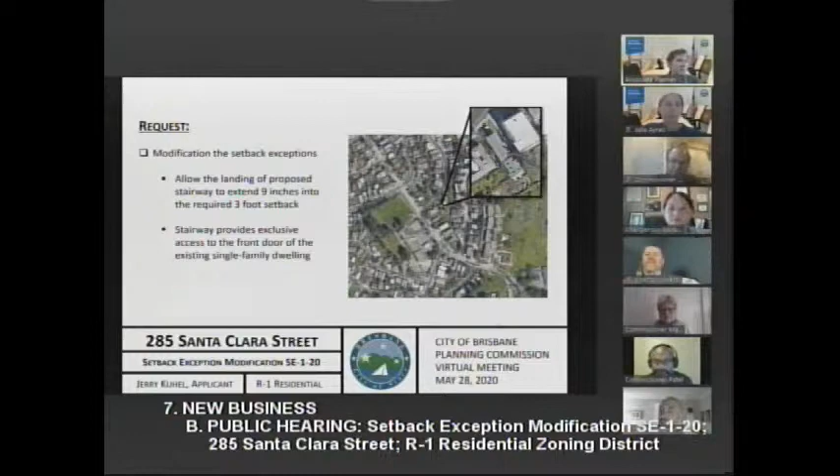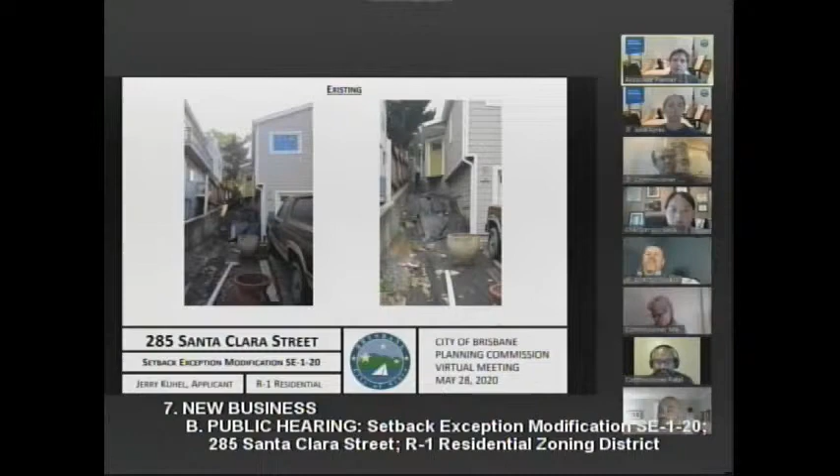Here's a couple photos of the existing conditions looking down the side setback there. You can see that the front door is at a 45-degree angle. Just keep a note of that. There was work done in 2004 that was approved by the Community Development Department that led to the current configuration of the interior of the home and the front door being in this spot. The stairs were not completed at that time. There have not been stairs there since.

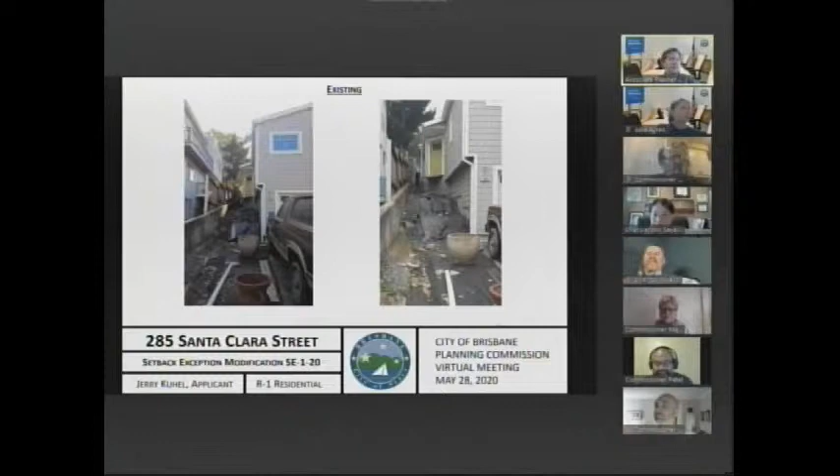The proposal is to have stairs on grade, beginning roughly where the garage door is, or in line with that garage door, going for about 15 feet, and then it'll become stairs, a metal staircase that extends to the front door. The steel staircase is going to be about 4 feet above grade, and the stairs itself are set back 3 feet, as you can see right here. It's just the landing, and the landing and stairway is designed to meet minimum building code, so that is the reason for the landing protruding slightly out into the setback.

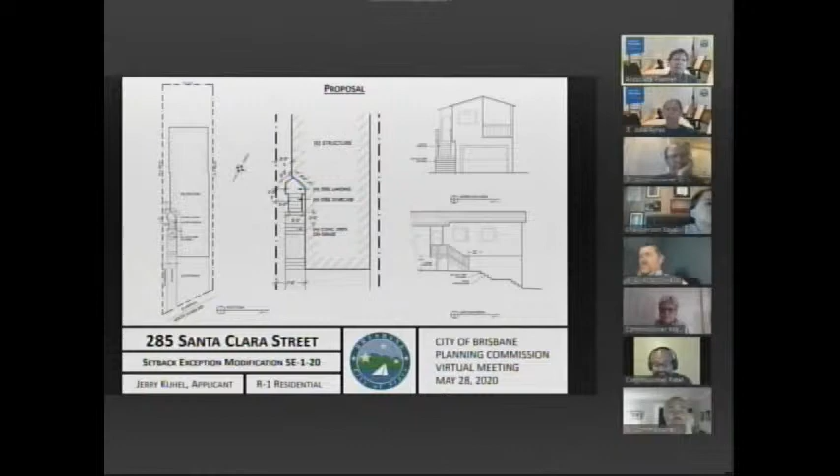Per Brisbane Municipal Code 17.32.070, subsection A2, there are three findings that need to be made to grant the setback modification or modification to the setback exception.

The first finding is that the modification must be to gain access to the property or residence. As mentioned earlier, this is for a stairway that goes to the front door. It is for the exclusive access to the home.

The second finding is that the modification is necessary because of unusual or special circumstances relating to the property. The property is a narrow lot. It's substandard, only 25 feet wide.

In order to have a stairway that would meet the setback exception would require significant modifications to the interior of the home, and the 45-degree angle of the door is also an issue for building code requirements.

The third finding is that visual impacts of the modification are minimized. The stairway and landing only extend about 4 feet above grade.

It's behind an existing privacy fence that's approximately 8 feet tall, and the stairway, as mentioned, is designed to meet minimum building standards, so it's nothing extravagant or excessive.

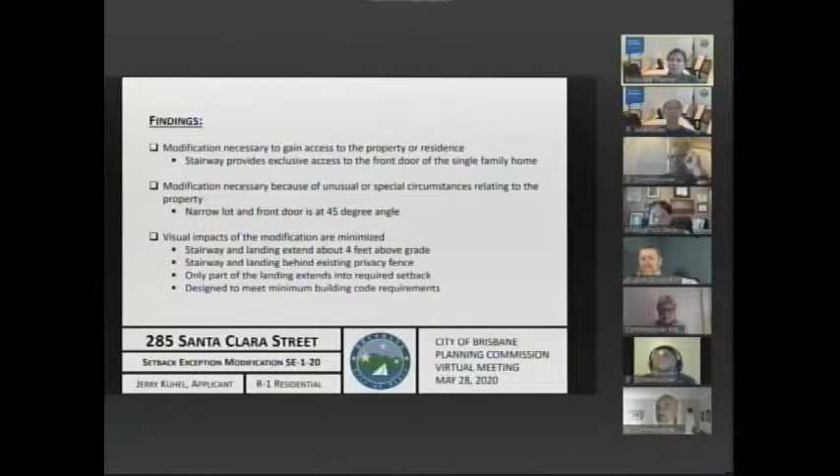Staff recommends approval of the setback exception modification by adoption of resolution SE-1-20.

Thank you. Does anyone have questions for staff? I see no commissioners' hands, so we will open the public hearing.

Can we hear from the applicant? Is he available? Yes, the applicant is in the waiting room. I will admit him.

He says it's still joining. I don't know if he's in yet.

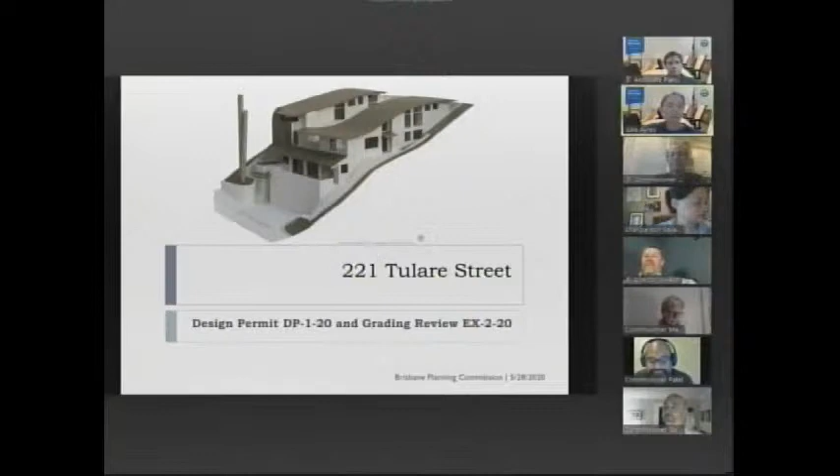The request before you tonight is for extension of 2 permits: design permit DP-2-18 and grading review EX-2-18, which were originally approved by the Commission on June 12, 2018, for construction of a new 3-unit, 3,690 square foot residential condo building, and for grading review for approximately 1,384 cubic yards of soil cut and export from the site.

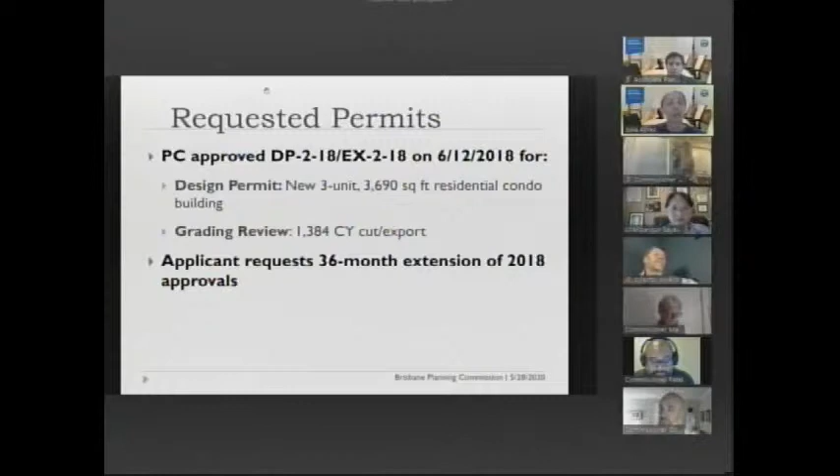The requested extension would be for a 36-month extension of these permit approvals per the provisions of Chapter 17.42, our design permit chapter. Although I should note that the applicant is readying a building permit package in the near term.

Here's an aerial to orient you to the site. This is a large lot, approximately just under 6,400 square feet in size. You can see it is in the R3 residential district, which runs upward the first block or so of Tulare Street up from Brisbane Ave, allowing multifamily development. Current development in the area varies between single-family dwellings, duplexes, and other multifamily buildings.

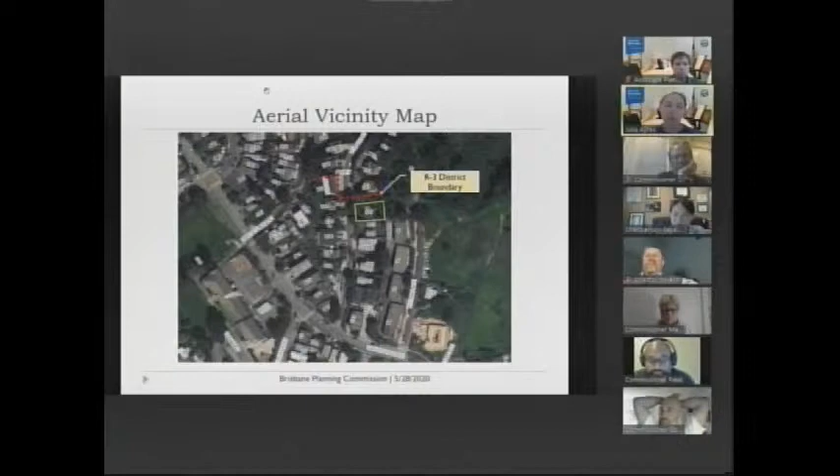The existing property is developed with a single-family home. The home is non-conforming in regards to parking and also maintains a non-conforming south side setback. In addition to the front lot line being about 18 feet beyond the paved travelway, the home itself is 23 feet beyond the front property line. So the existing structure is set very high up onto this hillside lot, which is about 41% slope.

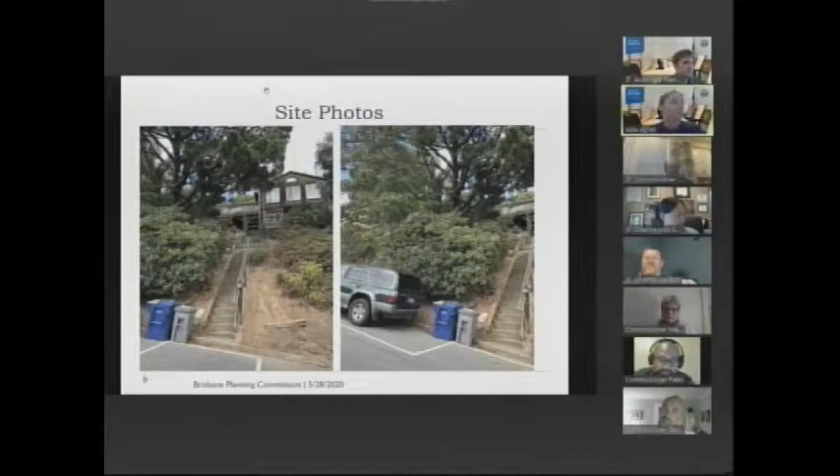There is parking in the public right-of-way adjacent to the property line, with room for about 2 parking spaces within the frontage of this lot. The lot frontage is about 56 feet.

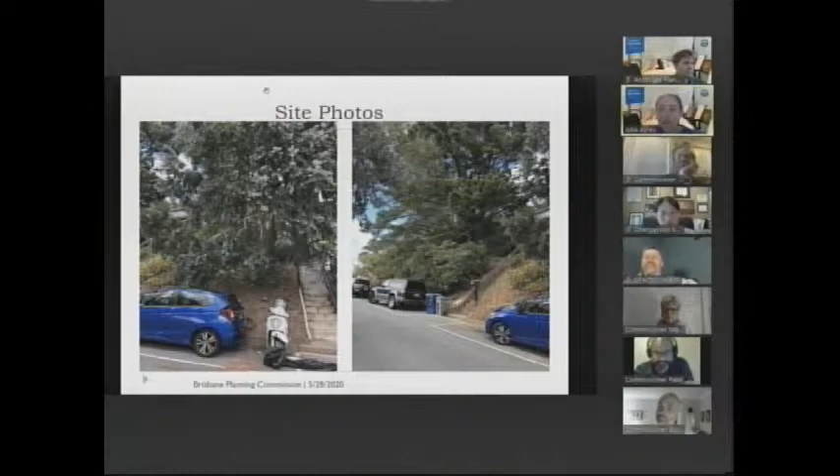Here's some additional views of the subject property, and here's the existing site plan, which shows the Tulare Street right-of-way. The property line is shown here in red, and the existing footprint of the existing structure is shown in purple.

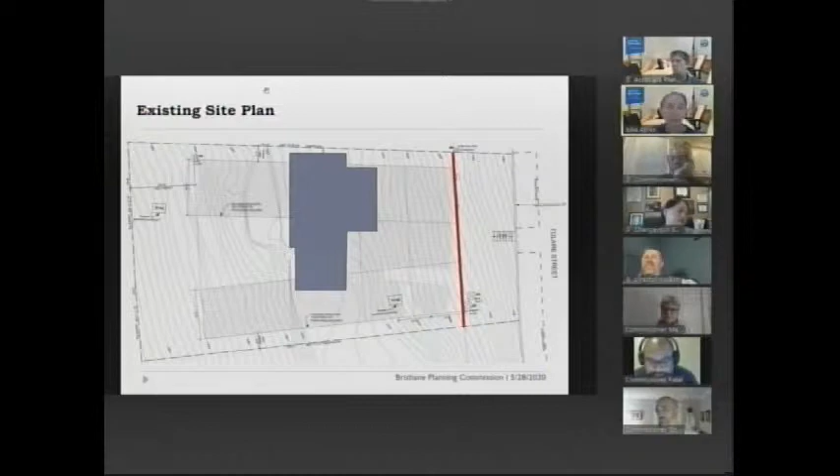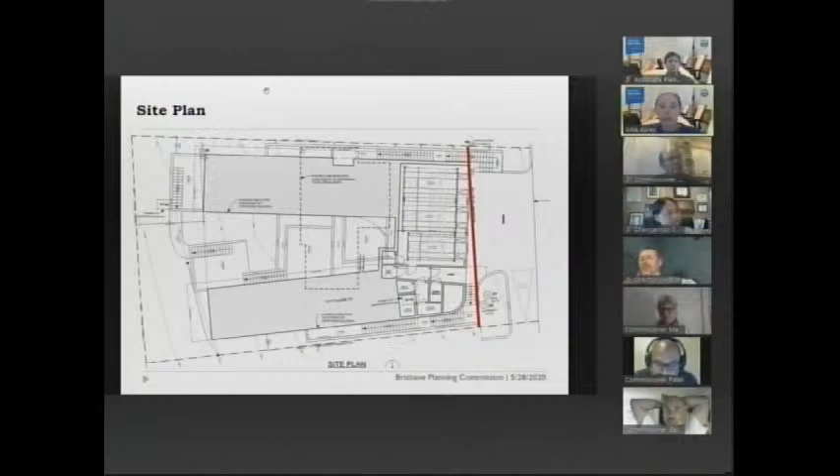Moving on to a project overview. This is the proposed site plan, with the property line highlighted in red. You can see that to provide parking for the project, the applicant is proposing a 3-car wide garage, but with the use of mechanical lifts, it would accommodate 6 cars in one garage. The new curb cut would be about 31 feet, and a new or improved public parking spot would be provided on the property frontage. You can see from the footprint of the building that it would be broken up into 2 wings, and we'll look through the floor plan to explore that further.

Here are our first and second floor plans. On the first floor, you have the garage and access from the street, as well as required storage areas and recycling and garbage areas. The first unit is on the second floor. It's the smallest unit, 1 bedroom, and it would have a balcony overlooking the street.

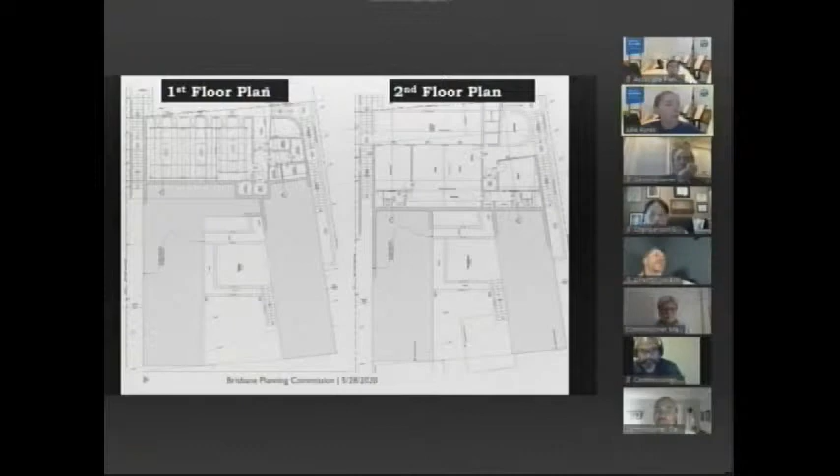Moving up to the 3rd and 4th floors, units 2 and 3 would be a bit larger, one about 1,200 square feet, the other about 1,300, essentially stepping up towards the slope of the hill. You can also see private patios in the interior courtyard space between the 2 wings of the building, for the use of those individual units, and the rear yard would be shared open area for all units.

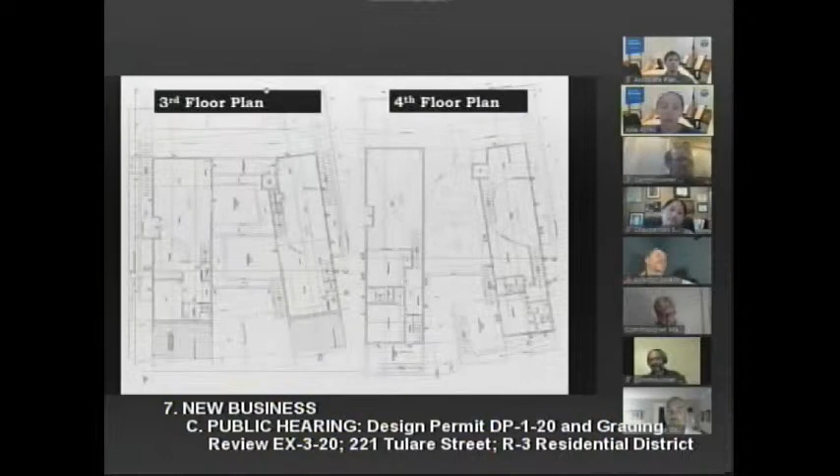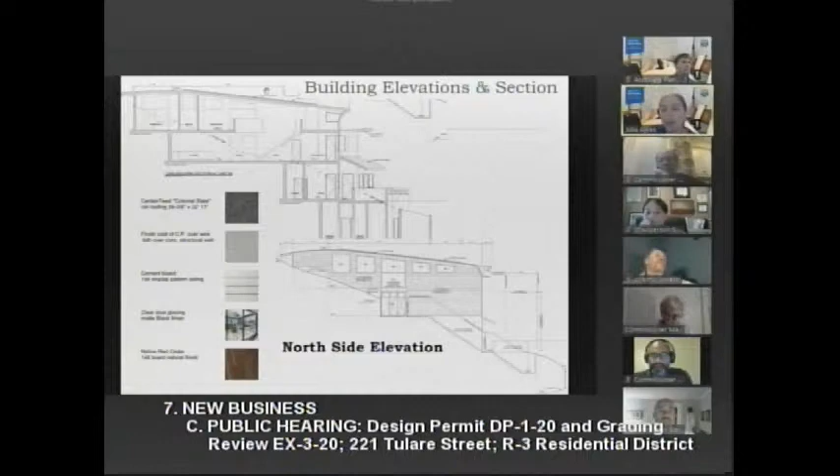Here you can see in the building elevations and sections that basically no part of the structure would appear to exceed 2 stories as seen from the street or from adjacent properties, due to the way that it steps into the hillside. The applicant has proposed a mix of cement shiplap siding and stucco finishes, and here's some additional elevations from the side as well as the front.

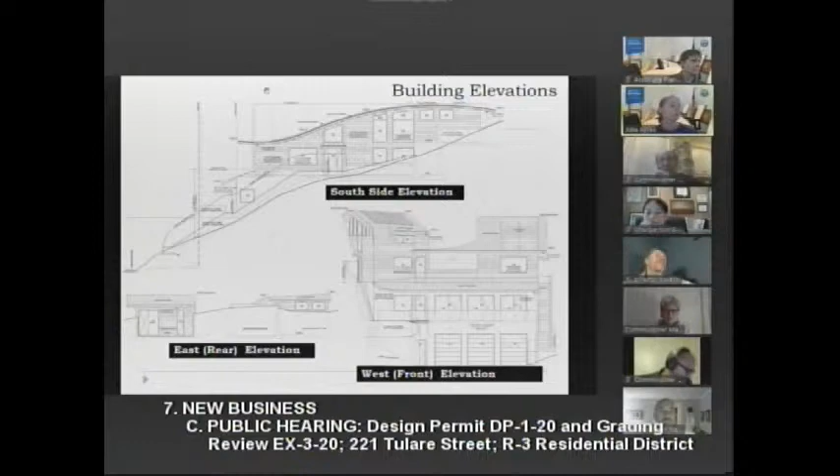The applicants prepared a conceptual landscape plan proposing a variety of native, low water use species on the site, plus the planting of 7 new trees. One tree, a cedar not protected under our updated tree ordinance, will be removed from the site. Two pine trees will also be removed from the public right-of-way to allow for the driveway and public parking space.

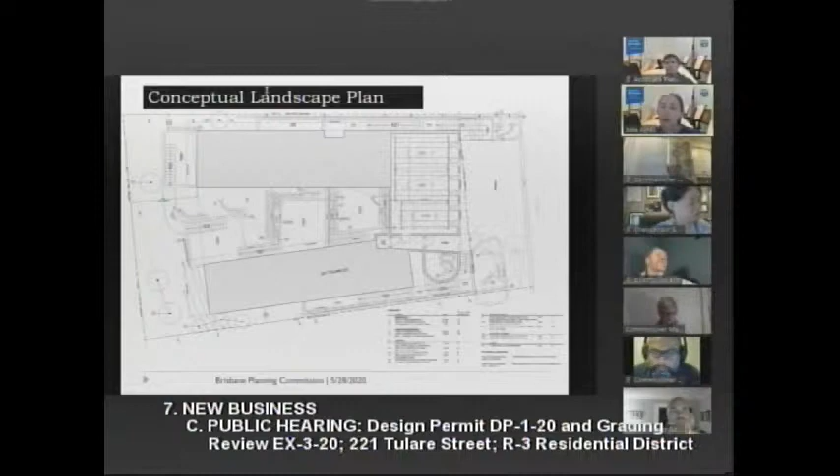Moving on to the findings and analysis for the design permit. The findings are very detailed, and we provided extensive written findings in the staff report and in Exhibit B to the resolution, so I'll summarize them here. Our findings fall into 4 general categories, the first being neighborhood compatibility.

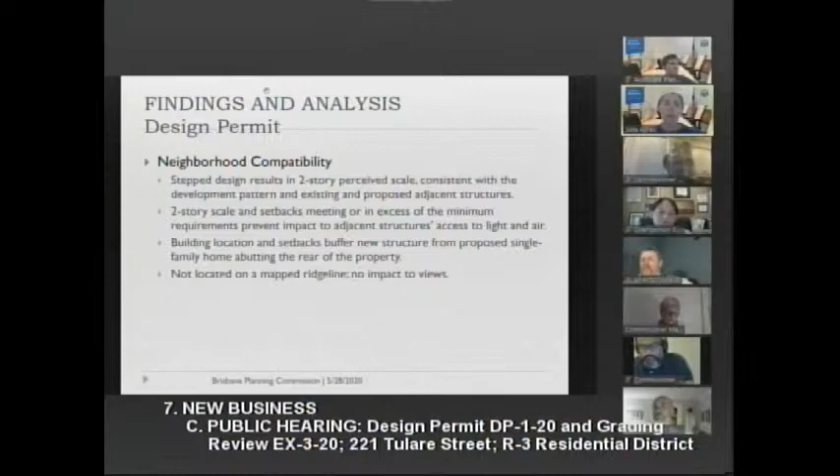This particular design is a step design, resulting in a perceived scale of a 2-story building consistent with the development pattern of both the existing structure and adjacent structures. It also provides adequate setbacks to eliminate impacts to adjacent properties in terms of light and air. The location and setbacks would buffer the new structure from a proposed single-family home abutting the rear of the property, now under construction at 99 Thomas, if you guys remember that project. There are no view impacts as it's not located on a mapped ridgeline.

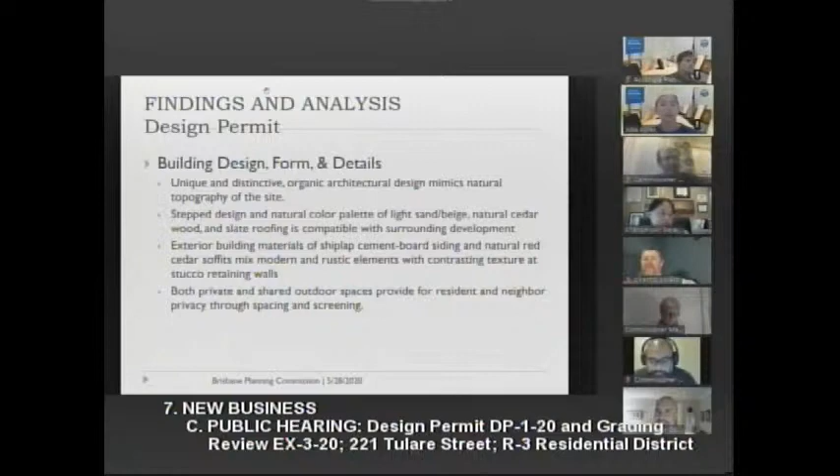When it comes to building design, form, and details, the applicants proposed a unique and distinctive organic architectural design that mimics the natural topography of the site. The step design and natural color palette are compatible with the surrounding physical development as well as the existing natural environment. The design also provides ample shared and private outdoor spaces that allow privacy for both residents on the site and neighboring properties.

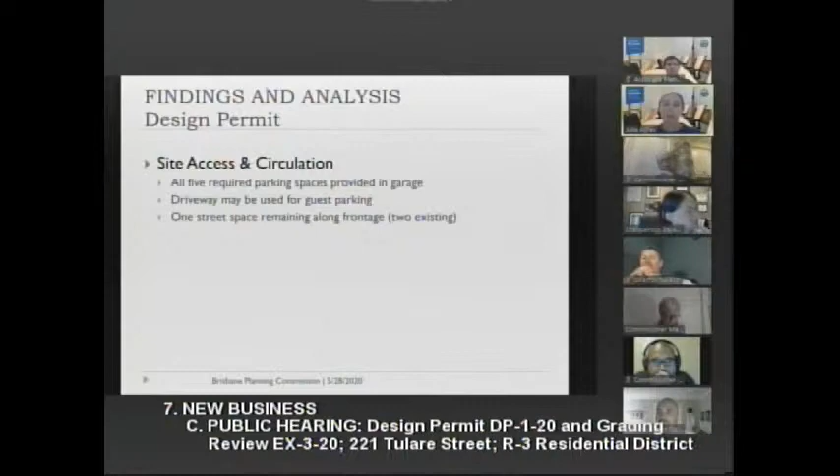In regards to landscaping, the proposed landscaping is in excess of the minimum required. As with any design project, we defer final approval of the landscape plan, including species and any necessary irrigation plans, to the building permit stage, where we'll evaluate whether our Water Conservation in Landscaping Ordinance needs to apply.

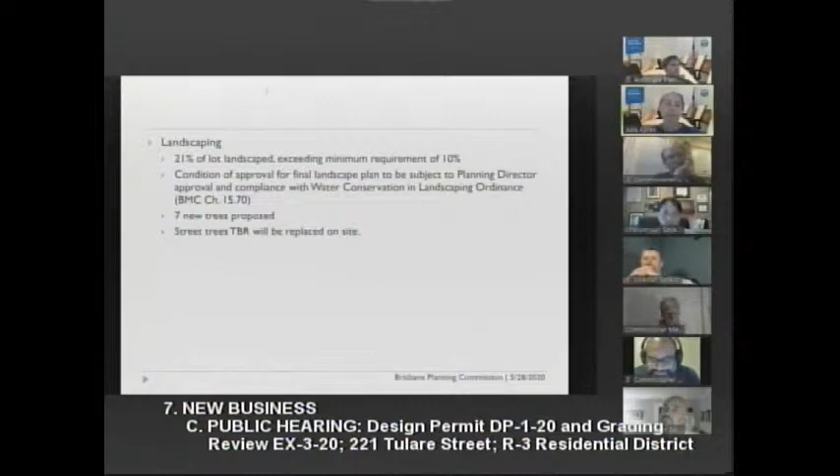In regards to grading, there are no findings for grading in the municipal code, so we use guidelines adopted by the Commission in 2003. The proposed grading is minimized. The majority of soil excavation and export is the minimum required to accommodate the required 5 on-site parking spaces, considering the steep slope of the site and its location relative to the right-of-way, about 18 feet beyond and 9 feet above. The step design also minimizes the required grading for the building pads at each floor, and the grading plan would maintain existing grades at the north and south side lot lines where there's adjacent development.

Regarding large exposed retaining walls, there are 2 walls around 6 to 7 feet in height at their tallest. The conditions of approval in the resolution would require those walls to be screened with vegetation or treated with different materials to break up the massing of the walls.

So 2 street trees are required to be removed due to their proximity both to the proposed structure and to the new driveway. While not required, the applicant has proposed planting 7 new trees in the conceptual landscape plan on the site to maintain the canopy in the neighborhood.

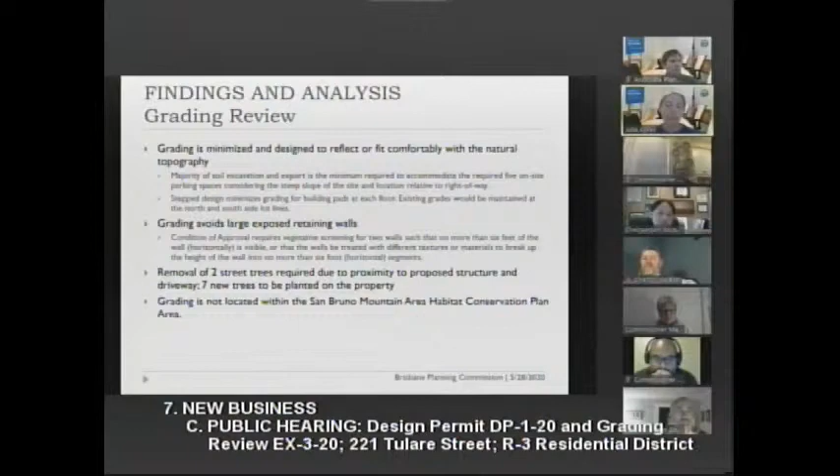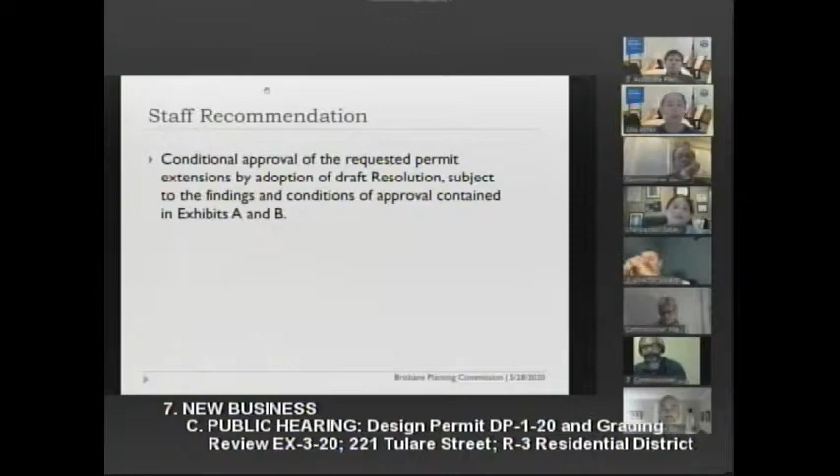I'll leave my staff report at that. We are recommending conditional approval of the extension request, which would extend the permits by 36 months, subject to the findings and conditions of approval contained in the resolution. I'm available for any questions should you have any.

Thank you, I don't have any questions. Does anyone have questions for staff?